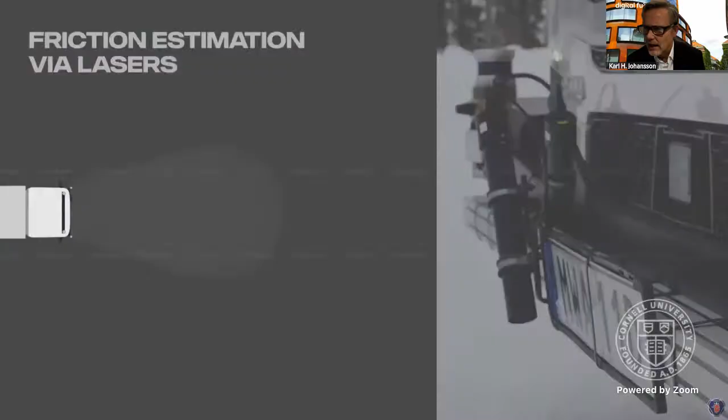So my talk today will cover some recent work that we have been doing on machine learning for control of traffic. But before I get into this detail, let me just start with a little video illustrating another project. We have been working in my group for 25 years now with Swedish truck industry. This is Scania, or Traton as they are called nowadays, a truck manufacturer located outside Stockholm. And we have been working on autonomy and efficiency for these vehicles for many years.

Right now, as you see from this video, one thing we are very interested in is how we can incorporate information about bad weather conditions or icy roads from new types of sensors in these vehicles. And you see some tests that we have been running last winter up north in Sweden, trying to incorporate this information automatically into the vehicle. So a lot is happening these days when it comes to autonomous trucks, autonomous cars, and so on. But this is not what I'm going to talk about.

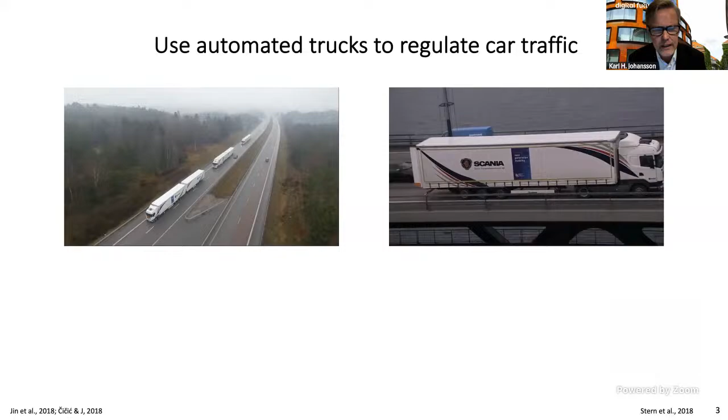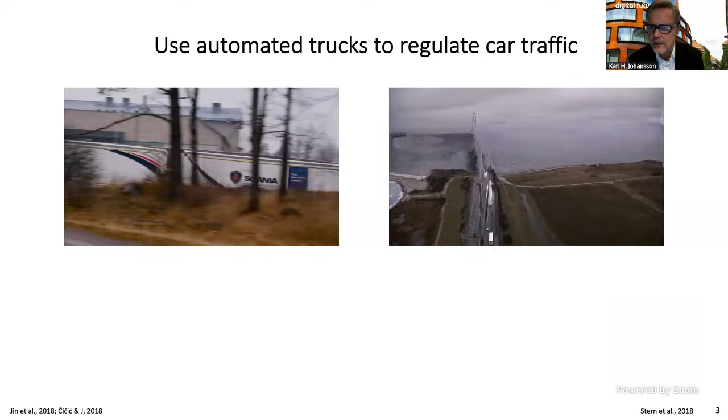I'm going to talk about, so to say, the future of this beyond current technology that is being tested, developed and prototyped. So what you see here is platooning trucks. This is something that we worked intensively on 10 years ago or so. And you see them going automated now on highways in Sweden, over the bridge in Denmark, and so on. So this is basically a technology that is available. Something that we started to think about a few years ago was that now that we have these autonomous truck platoons, we can actually use them to control traffic.

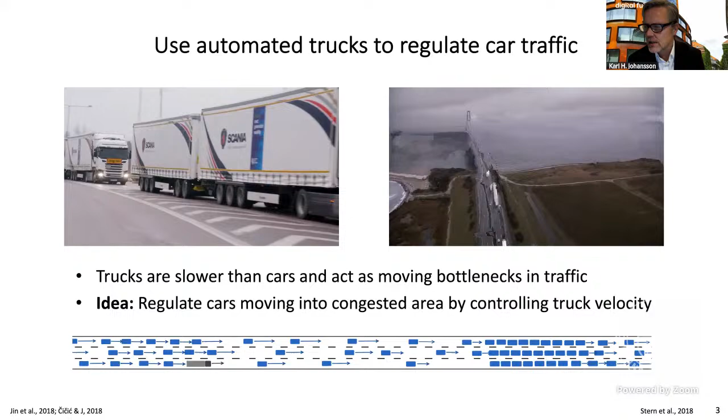If you look at the picture on the bottom of this slide, think about the gray truck there: typically trucks move a little bit slower than the cars. In Sweden, for instance, trucks go 85 km per hour, while the cars go 110 or 120 km per hour. Which means that the truck is acting as a bottleneck for the car traffic. So basically think of it like a fluid of cars, and the trucks are stopping it up a little bit.

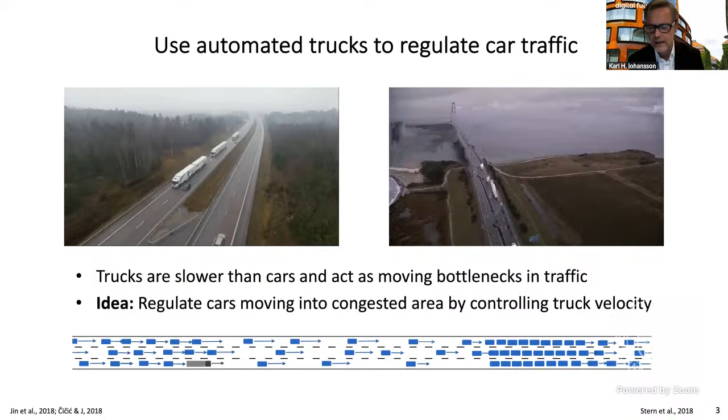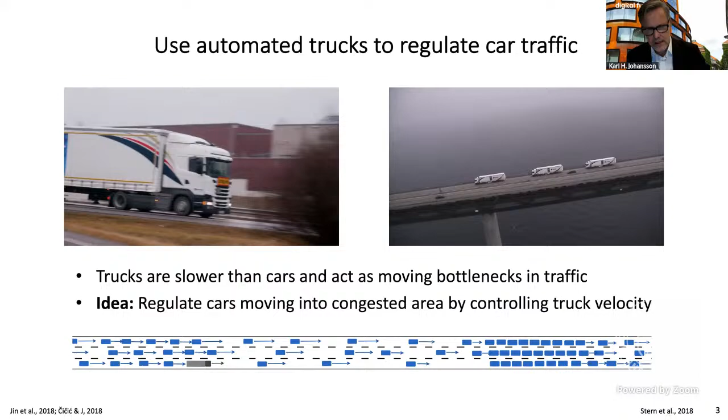So the problem we got interested in is how can we regulate traffic? How can we improve traffic conditions by regulating a few automated vehicles, in this case truck platoons, in order to improve life for everybody, basically using the road infrastructure in a more efficient way. So this is what I would like to talk about, and I will talk about some fundamentals. How do we model this? What is a good, appropriate model? How do we get this model from data? And then how do we use this model to do estimation, prediction, and control?

But we will start from the very basics here, because it's quite fascinating to think that if we go back to the 18th century, fluid flows were considered by two scientists, Euler and Lagrange, that we all know about, right? And we all studied them in our high school physics courses. If you remind yourself what Euler did when he derived his equations for fluid motion, he considered an intersection of a pipe where the fluid was transported, and then he derived his equation for the fluid at that intersection.

Lagrange did something different. Lagrange considered a little parcel of fluid, and then he considered what happens with that now when it evolves over a small time interval delta t. And then he derived his equation of motion out of this.

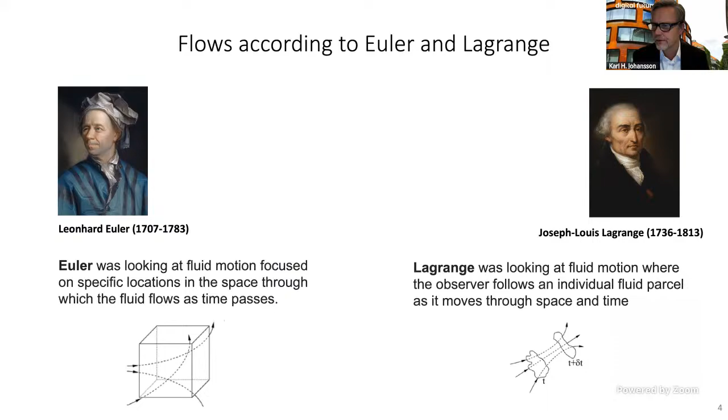None of them, as far as I know, studied traffic, but if we think about traffic and traffic control technology, it's basically Euler who defines the way that we control most traffic today on highways, right? I'm sure outside Ithaca, and here outside Stockholm, we have this type of traffic sensors. You have these gantries which are measuring density and flow of cars passing through.

If you now think about it from a Lagrange perspective instead, think that instead of measuring the density and flow of vehicles at a particular point in space, we can now use floating car data. We can use that all the vehicles more or less are connected, either through the driver having a mobile phone or through the vehicle itself being connected. And from that information, from the actual fluid of vehicles, we can then get information about density and flow, right?

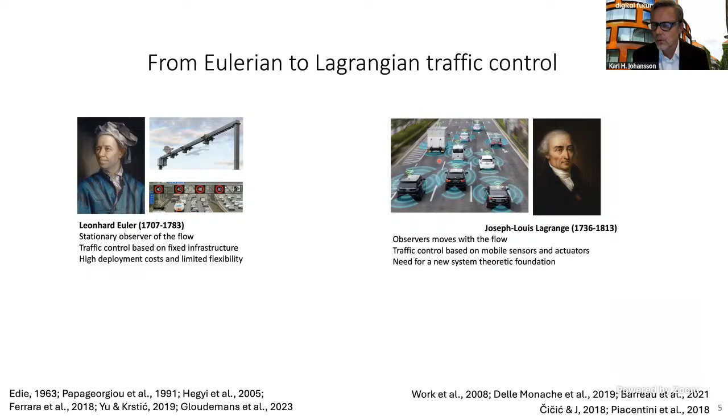But we can also think about that we have actuators. So that truck that you see here to the left, imagine that it is automated now, or that it can be remotely actuated. The velocity could be set in that truck, and in that way it would act as an actuator in this fluid. So the interesting feedback control system that we basically get out of the Lagrange way of thinking of traffic is what you see down to the right there.

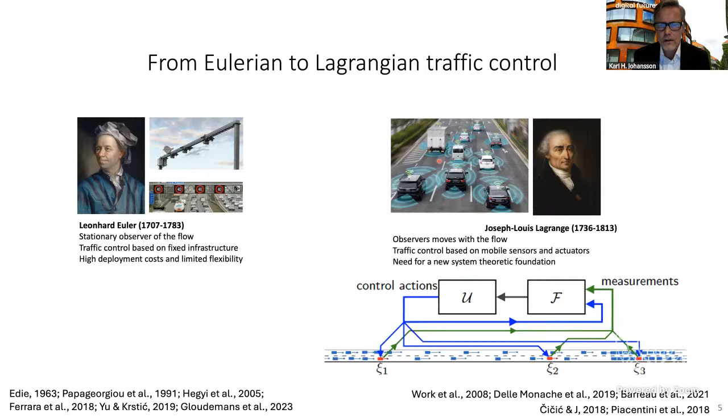So we measure the information about the plant, about the traffic. We send that into a filter, and then based on that filter, we take actions, and actions are perhaps taken by the same vehicle or by different vehicles. So this is a control architecture that we have been working on over the last 5 years or so with some students and postdocs, and others continue working on this.

So it's an interesting application, and I know many of you are working on vehicles and traffic, right? But also if you're more interested in theory and mathematics, it actually poses quite some interesting fundamental problems, because it's seldom in control theory that we have sensors and actuators moving in the actual plant that we are controlling. But this is basically what I'm showing to you here, right?

So again, let me just repeat. What we have is a number of connected and autonomous vehicles. They are measuring the density and flow around them. These measurements are then incorporated into a model that we are learning out of that data. That is a model of the traffic. And then this model is used in order to reconstruct and predict the state of the traffic.

And then based on that prediction, we control the action of these red vehicles. That could be the trucks that I showed you earlier. And in that way, we try to regulate the traffic in a better way. So that is, so to say, the system that we are now going to discuss in a little bit more detail.

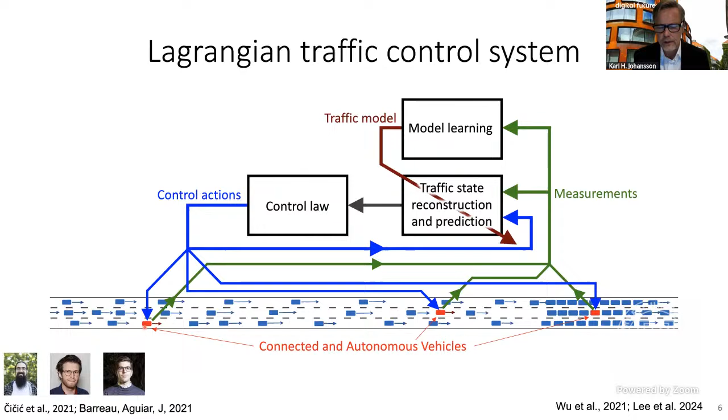In order to do that, we need to look a little bit into the very basics of traffic models. To a large extent, you can say over the last 100 years or so, it's been dominated by two types of models. One type of model is microscopic models. In the microscopic models, we model each individual vehicle. You see it's like a dot here, right? So over a road of length L here, we have a number of such vehicles.

The other extreme, so to say, the other type of model that we have, is called macroscopic traffic models. In these models, we forget about the individual vehicle. Instead, we represent vehicles through their density over this road segment.

So the density rho here is a function of the position along the road and time. In this case, as you see, if the density is high, then it's close to 1. If the density is low, it's close to 0. So these two fundamentally different models give rise to different mathematical models also.

So in the first case, you would follow Newton, right? You model each individual vehicle through Newton mechanics, saying that the velocity of the vehicle is given by some map v, that for instance could depend on the density that we have at that point. While in the macroscopic model, we use a partial differential equation.

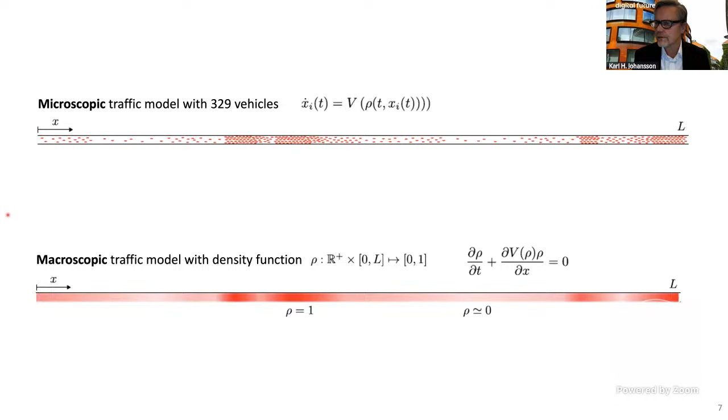If the density is small, the flow grows linearly with the density, up to a maximum, and that maximum is the maximum capacity of the road. If the density of vehicles grows further, the flow decreases like that. So this was a 1-minute crash course in traffic theory and two of these classical models.

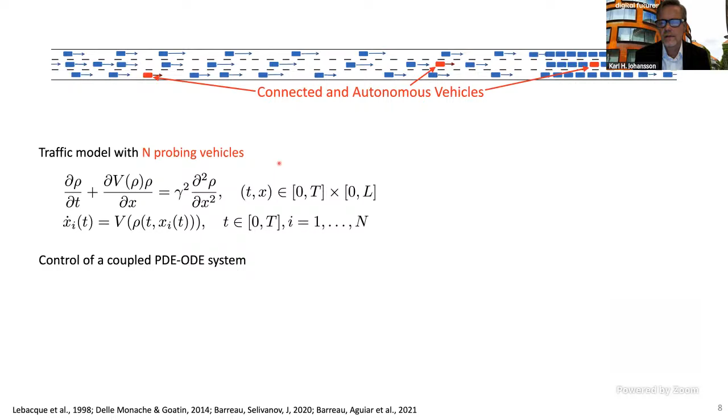Then you see that this space is colored, and the color represents the density of vehicles. In this case, a more reddish color means high density, so vehicles are moving slower. So this is, so to say, the object we are going to consider.

So now, based on this, what we are interested in is, out of the probe vehicles, we would like to reconstruct a model of the traffic. So if you allow me to jump back to the previous picture, what I'm saying is that out of measurements taken by these black lines, these vehicles that travel there, the question is, can I reconstruct the color all over this space that I have? I assume now that I can measure around each vehicle, but can I extrapolate or interpolate in between vehicles?

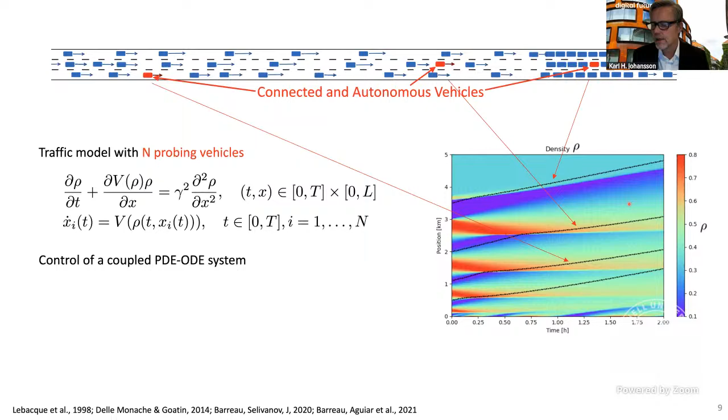Of course, if we have too few vehicles, this is impossible if there are too many changes happening in the density. But under certain circumstances, it could be interesting to see if this works or not. So mathematically, how do we formulate that problem? So this is what we will do next now.

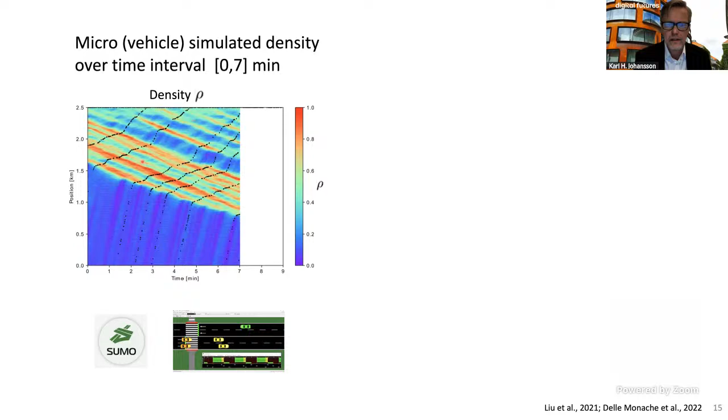So again, the color here indicates what is the density of these vehicles when I run these particle simulations. The black curves here again are the probe vehicles. So remember that out of these probe vehicles, we would like to find out the true density in between the vehicles. So we do that using the technique that I just explained. So we basically now use this model and we look at what is the density that we obtain.

So I run this model now for 2 more minutes, and you see this is the way I can predict into the future the evolution of the traffic. Of course, I don't have any information from the probe vehicles about the future there, right? So this is just open loop prediction in this particular case.

So let's look a little bit more into the data of what is the result, so to say, out of this neural network. So let me remind you that we were training 2 neural networks. One was a map from T and X to rho. So that is, of course, exactly the color that you see there. So it's exactly that map, right?

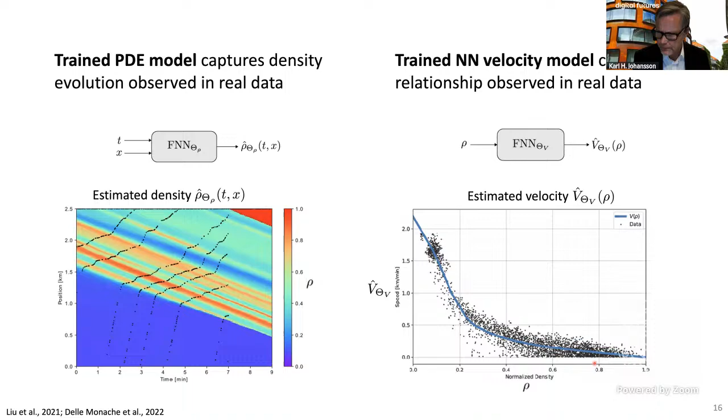So you see we get something where the velocity decreases with the density. We can now, of course, instead of plotting velocity here on the y-axis, plot rho times velocity. So we get the flow instead. And then you see that we get again that shape of the fundamental diagram that you have seen before.

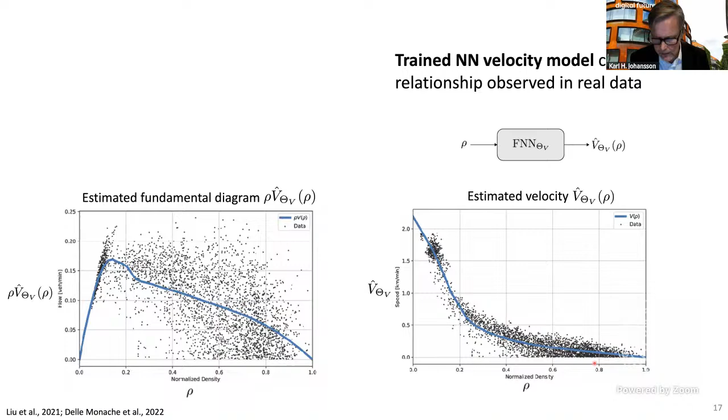But in this case, we have obtained that by training on the data that we got from these individual probe vehicles, and we obtain this automatically. So it seems like it's working pretty well. Let's now turn to using this for that type of control that I described earlier. In this particular case, I will only describe the simplest type of control you can think about.

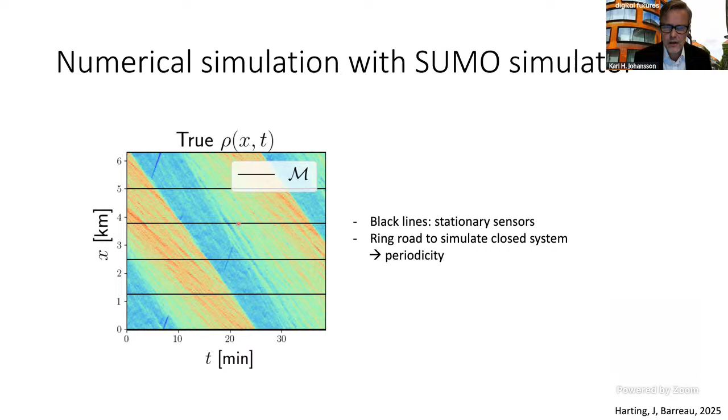So just doing prediction with this open loop observer doesn't work. Over short time instances it works, but you cannot use it consistently because it's unstable. You can do an ad hoc solution to that. You could reset the estimate periodically, right? So you do this open loop observation, then you reset it, then you predict again from that point, reset it, and so on.

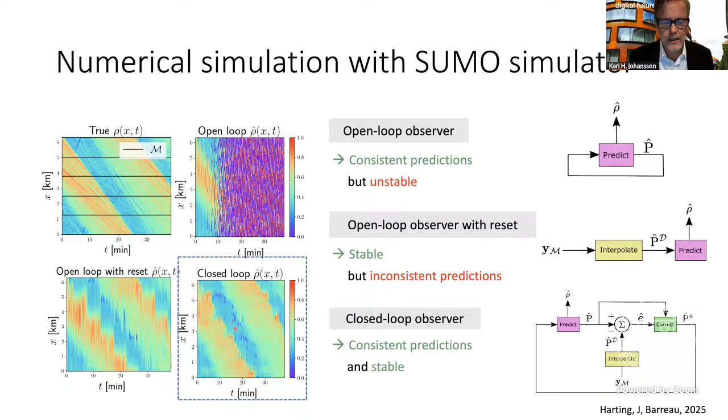We can now vary the certainty of the data here to check what happens. So in the left case was the perfect situation, no noise on the data. If we add noise now on the data, you see that the error that we get with our method is a little bit bigger than in the non-error case, but it's doing much better than the other two cases.

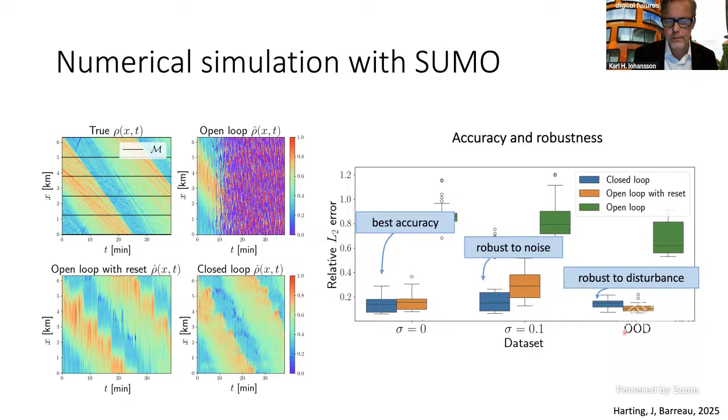When we do machine learning, one often compares with something called out of distribution data. So you take data now that doesn't have the same distribution as the one that you train with. And also under these circumstances, you see that we are robust to that type of disturbances. And as I said, in our case, this closed loop, as well as with the open loop with reset, we're able to have a stable estimate, which is not the case otherwise.

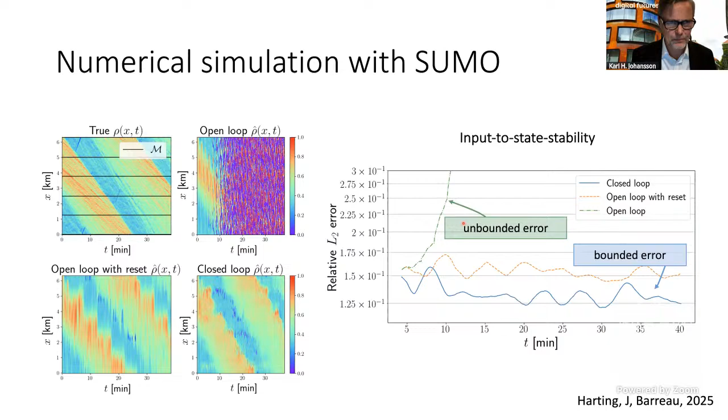So with that, I would like to wrap up, and I hope we have time for some discussions and questions. So what I talked about here today is how we can use individual vehicles to regulate car traffic. I argued about it using trucks. It's not only because we have been working on trucks for a long time, but also trucks are driven by professional drivers, and the technology for automating trucks is easier to do. A truck costs more money, and also it has more advanced technology usually than a car.

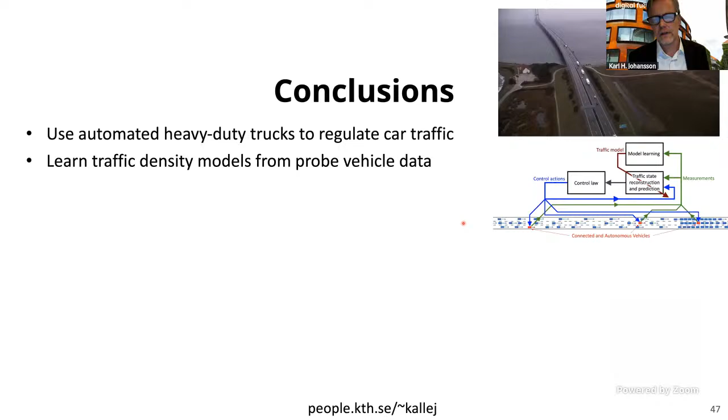So today a modern truck, for instance, that we are experimenting with, we have a GPU on board and so on. So there is a lot of computational capability. And therefore, I think this is a very relevant problem to think about. We propose a particular control architecture for actually learning traffic models from data from individual vehicles. And then I show two different approaches to build estimators on that type of data. One builds on PINNs and the other one on Fourier neural operators.

Let me also say two things I call extensions here. So I didn't talk about implementation, but as you can imagine, we want to do these things fast. So one relevant problem, and we also have another CDC paper on that, is how do you get real-time implementation out of this? How can you run this iteratively and fast enough so you can actually use it for controlling traffic? So that is one important aspect where I think also more work needs to be done.

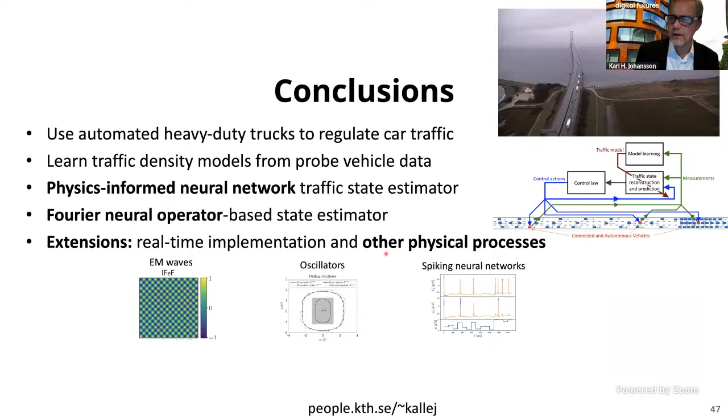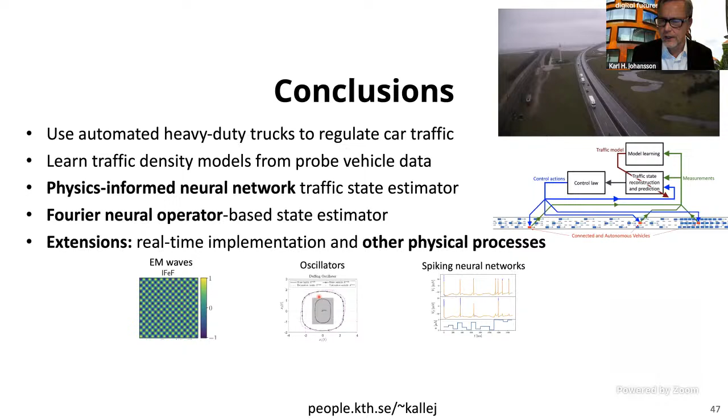But also, let me highlight, now we talked all about traffic here today, but similar approaches where we have plant dynamics, process dynamics, which is not just a linear ODE or a nonlinear ODE, but more complex types of dynamics like PDEs and so on, pop up in many different areas. And now with new techniques, one can actually model them and build data-based models combined with physics models. And we have been doing that in a few different areas. And we are quite excited both building control theory around such frameworks, but also implementing and testing it in practice.

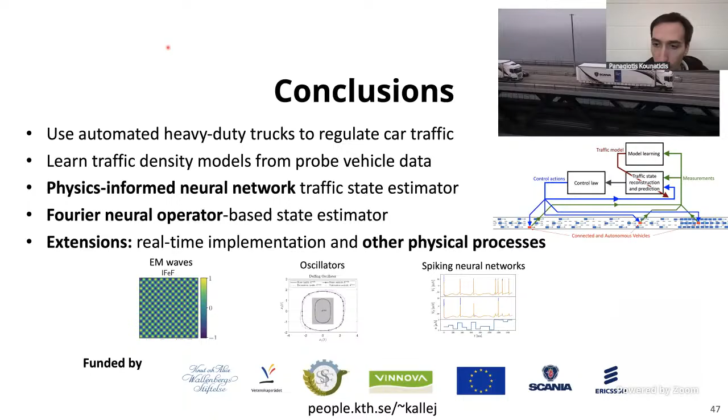With this model that we have here, this second order PDE model, we cannot theoretically prove that this is going to converge or that we will have a zero gap in this iteration. But under certain assumptions, one can make guarantees. But in this particular implementation I was describing here, unfortunately, there is no such general guarantee other than under certain further assumptions that I didn't go into here in detail. Thanks for that question.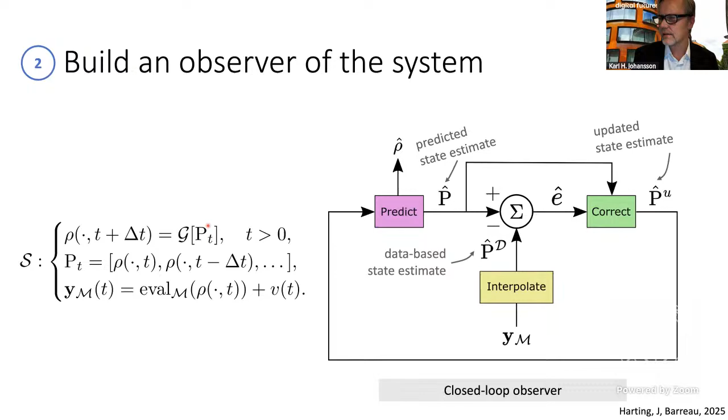Yes. Okay. Thank you very much, Professor. I don't have any other questions. Can I ask a question? Yes. Hi, Dr. Johansson.

I have a big picture question. I'm not that familiar with traffic theory. When it comes to the fundamental diagram, what factors affect the exact shape of the fundamental diagram? When you introduce the truck, the shape shifted down, and do road conditions, maybe the geographic location within the country, and all sorts of factors matter? How is the shape exactly determined, or what does it depend on?

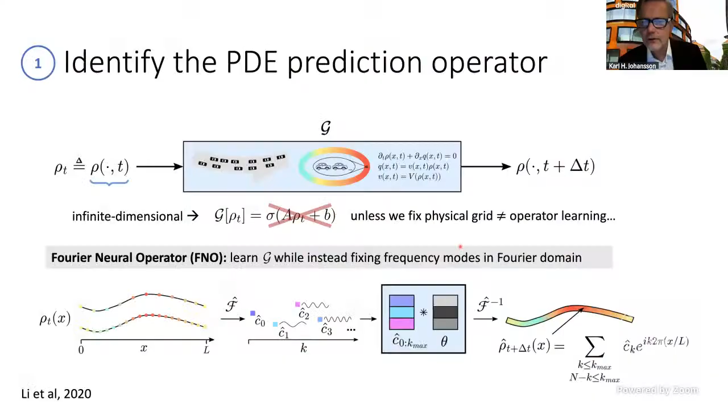Yeah, thanks for that question. Maybe I start sharing again. Let me comment a little bit more on the fundamental diagram in general, because, as I said, this goes back a long time when people introduced this type of models, and in the literature, you can go to conferences in traffic and they talk about different ways of estimating this.

Before I answer your question, Nishan, I would like to highlight one thing: in traffic, you can consider it as I do in this talk, that the fundamental diagram is basically describing properties of one road segment. But that is a very basic way of doing it if you talk with traffic experts, because they also use this when you look at a part of a city. Then the fundamental diagram describes not how you can drive on one road, but how you drive through a certain part of the city and the density of traffic in that city.

I wanted to say that first, because notice when I talk about modeling this road segment, I basically use that model as a way of translating data into a way of doing control. In this particular work, this is the only thing I'm doing. I'm getting data from the vehicles, and how should I incorporate that in a control algorithm? I do that by estimating that diagram, and then I incorporate it into the control, because I talk about changing the shape and so on.

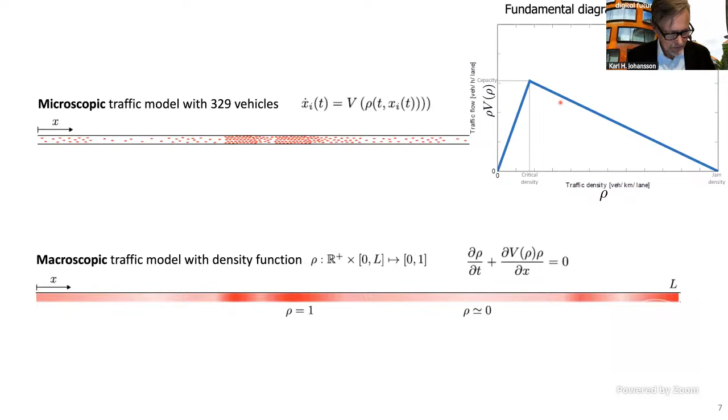So you see that the fundamental diagram, in my view, is like an abstraction with which you can reason about certain physical properties, but one has to be a little bit careful when one translates it to any type of control or any type of model here. In any traffic theory textbook you will see a chapter on this and a discussion and so on. I just wanted to illustrate this a little bit. I don't know if I answered your question now, but at least I elaborated a bit.

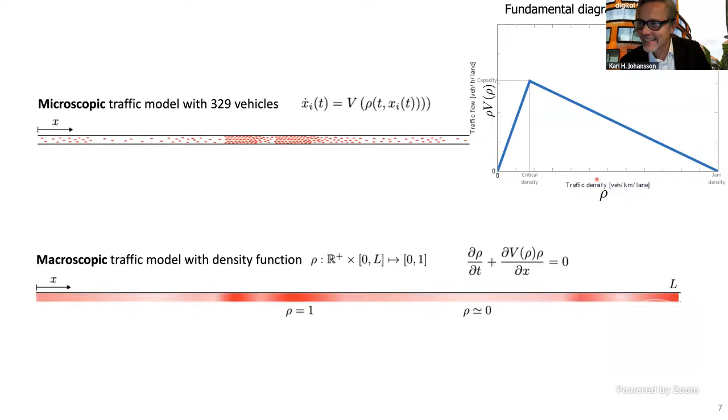Yeah, definitely. Thank you so much. Thank you. Thanks. Thank you very much, Professor.

I have another question. Could the traffic density estimation and flow control be implemented simultaneously in an online manner? Absolutely. That's really why I like giving these talks, because my presentation here is not telling, okay, this is the way that we are going to control traffic for the coming 50 years or something like that. I really see this work that we are doing as opening up a number of different new questions of how control can actually be done.

So now you can ask exactly the question you were asking. Could we, directly based on data that I have around me as a vehicle, maybe one vehicle or maybe a few vehicles around, implement something along the lines of what I talk about here in a distributed or semi-distributed way, using just data directly, and control the vehicle? Notice that what I presented is a very centralized type of structure, right? Vehicles propagate their information into a central model, then I do the computation for the control based on that model, then distribute it out.